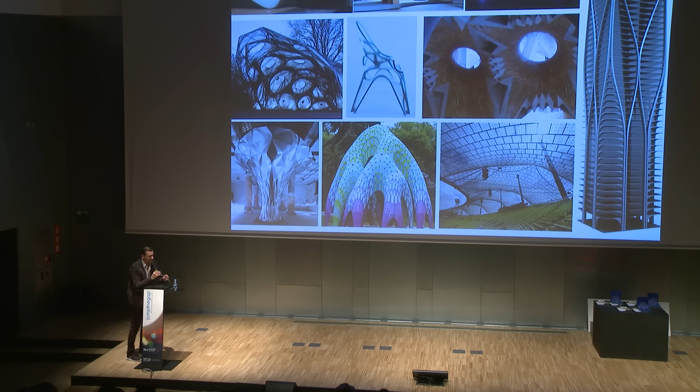So I will spend a few minutes on this. This is what this new world looks like, and you can see it's very rich, very diverse in terms of textures, morphologies, even colors, materials, detail reticulations, etc.

And it has some precursors, you can see in the images. Sagrada Familia is one of them, the great Gaudi, who was not inventing form but finding form according to the logics of structure and physics, and Frei Otto as well. The rest are all contemporary figures. We are within that, but there are quite a few others. I want to name, for instance, Achim Menges and Marc Fornes, among many others.

So this is how I want to define Tectonism: it is a stylistic heightening of engineering and fabrication-based form finding and optimization processes. Stylistic heightening because, after all, as designers we are very much interested in expression, and design is always also communication. So it is not only an aspect for us of technical optimization, but the morphologies coming out of this are very rich and become a beautiful repertoire of articulation.

So, in terms of my theory of styles, I'm distinguishing epochal styles, and the last big transition was from modernism to what I now call parametricism, which has to do with the introduction of computational technologies, but also changes in society driven by the convergence of computation and telecommunication, which has dynamized society and required a new style, I would believe. You can see that modernism has a series of subsidiary styles.

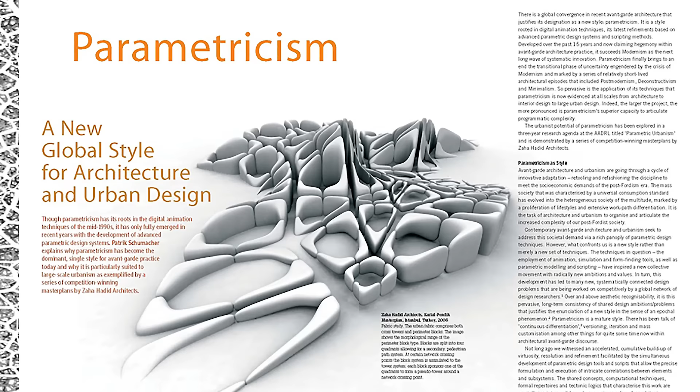So parametricism, I think, emerged in the mid to late 90s, and 10 years later I was reflecting on the fact that we had a new stable paradigm for over 10 years, and I coined the phrase parametricism. Actually, parametricism also encompasses urban design and a new order of the city, as well as architecture, interiors, and product design. So this is just an overview.

That's the work of Zaha Hadid Architects across the various scales, all the way from urbanism through architecture to products. And there's a kind of precursor: Zaha's first sketches from the 80s already show this interest in a new level of complexity and dynamism in her repertoire.

And in terms of the first expression, as it were, of parametricism, I term it in retrospect Foldism. It starts with the idea that instead of building up complexity by adding up pieces or layering pieces like in deconstructivism, one can take a single surface and differentiate it—a very adaptive and fluid set of systems which pick up contextual features, internal requirements, and gets something going which has both coherence and intensive differentiation.

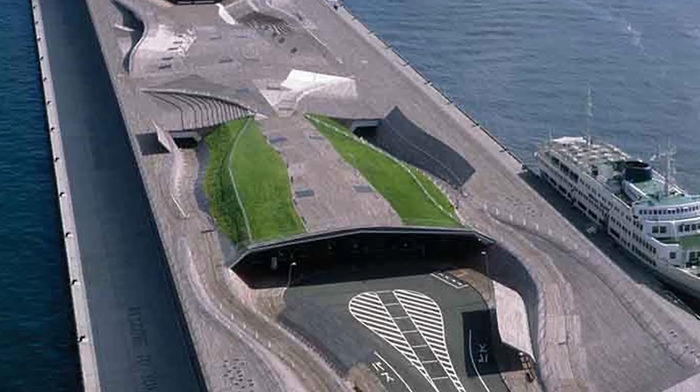So there are just a few of those projects which worked with this kind of idea of a differentiated single surface. It's not only Zaha Hadid Architects, there's also FOA. It also moves from buildings to furnishings. Some of our works, student work—this was corporate interiors, urbanism again.

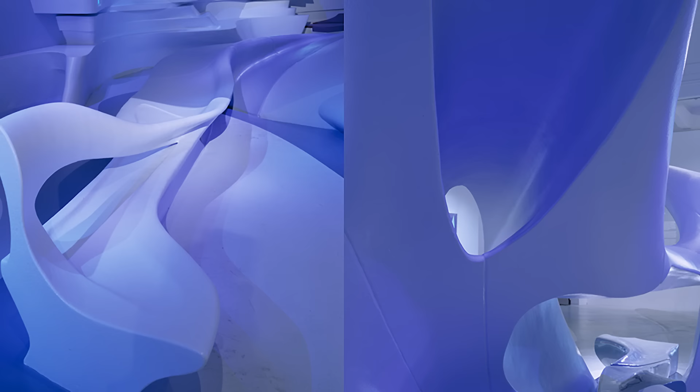And interiors. You can see here that the idea is that you have a continuous variation where situations morph and modulate from one into the other seamlessly. So it stands against a clear separation of domains and against the cellularization of space into discrete and separate domains. I'm just going to move you through some of those interiors.

Now, there's also a bathroom from us, part of a hotel room, actually in Madrid. This is a continuous Corian surface, a material where a lot happens in the bathroom, so it's used for the whole room. You can see here that the elements are not plugged onto each other, but one surface is modulated—this is a door where the handle is kind of evolving out of the door surface, or a table which I've designed.

But we also find this kind of philosophy in car design. Instead of plugging on a kind of headlight, it's kind of modulated into the surface.

And it also goes into product design and fashion design, jewelry design, if you like. So the idea of parametricism and these kinds of surfaces is that there could be a system, or genotype, which can then adapt itself to different conditions and vary across. Again, in an interior where all the different features and aspects are made out of one continuous surface.

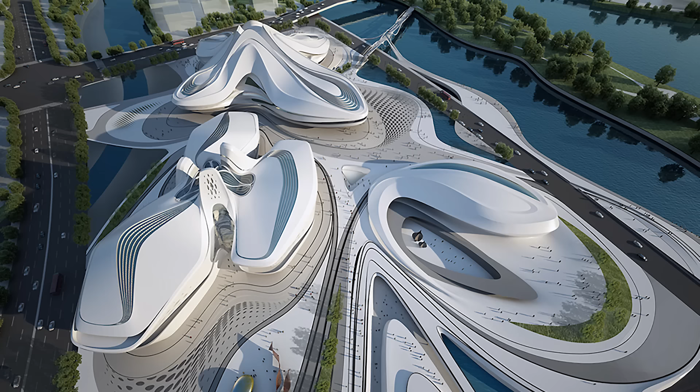A more recent attempt, the way three different institutions of a cultural complex — a museum, an opera house, and a multipurpose house — it's all about embedding this into a landscape and becoming, again, a continuous surface condition.

This is just about to finish on site right now. So as you can see, Foldism continues, even though we are in a different stage. These projects take many years to evolve, so what is happening now and finishing on site is not necessarily the latest in our design thinking.

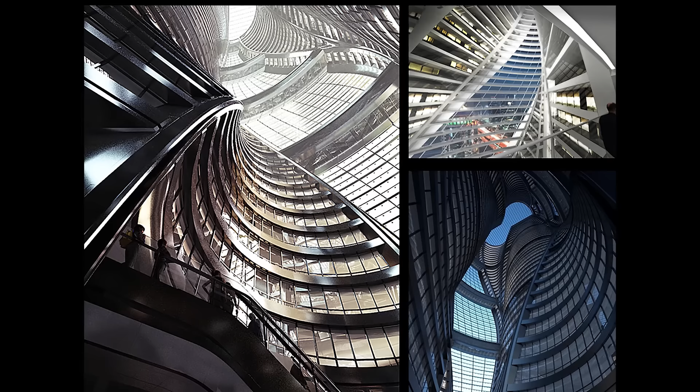Again, this also goes for interior spaces. The continuity of space — we're also applying this to towers now. Instead of separating floor by floor and then cellularizing everything, it's all about a continuous experience you can navigate. So I'm very interested in towers which are opened up through interior atriums.

So the next stage, very similar in a way, is this idea of blobism — blobs, volumes which fuse. Again, it's nearly another version of that first stage, where you move smoothly from one zone to another, and they're kind of partially articulated. And again, there's a whole world of elements which comes out of that.

And you see, it's quite striking set against all prior architecture. It sticks out, but it also delivers a new level of complexity, three-dimensionality. I describe it as maintaining legibility in the face of complexity. The fused three-dimensionality of this is remarkable.

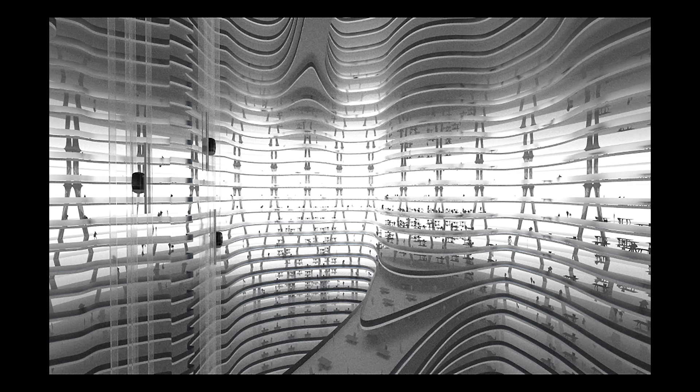And again, this is my new passion for mega atriums — the interior continuously differentiated, an interior world where everything is inter-aware, intervisible, and variation instead of separation is the game. This is a project which we're actually working on now, trying to bring it on site.

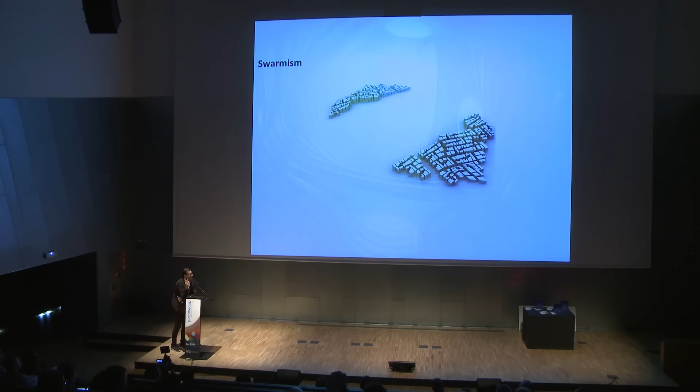Swarmism is something very similar also, but it applies to urbanism and the idea of having discrete elements, but so many that they're no longer parts, but particles which associate in different ways and can differentiate an urban scene. So you don't need to have literal contiguity — you can have swarms of elements which deliver variation and differentiation. And again, I'm interested that this operates on an urban scale as well as on an interior and product scale even.

Tectonism — so what's new? The difference is you can see it immediately: there's much more grain, texture, variety. It's not just the different morphologies and forms, they actually become disciplines. It's not just the NURB surfaces, but you can see there's creases, pleats, much more distinct identities, and there's various different materialities, and the material matters and becomes a driver of both the overall form and the articulation.

So we now show structure much more, rather than kind of wrapping everything into continuous surfaces. So the tectonics has always been this principle of—

heightening technical issues, whether it's these joint lines, which the form of the arc, the way the stones are set, as well as then the expression of the strong joints and the rustication, shows that everything which is initially a structural material logic becomes heightened into a stylistic expression and an ornamental understanding. So ornament and structure are not separate — they're dimensions of architecture which fold on top of each other.

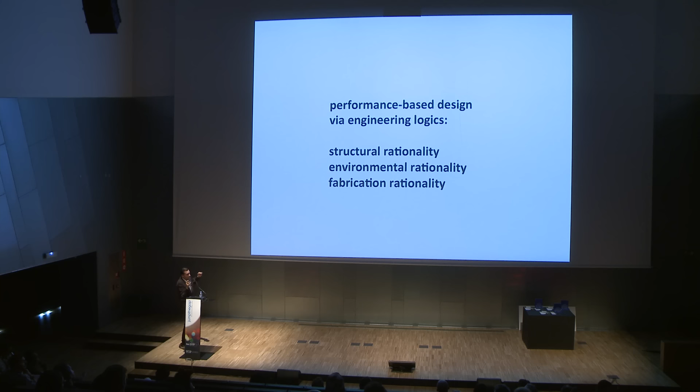So we're starting with performance-based design via engineering logics, and we're looking at structural, environmental, and fabrication rationalities. And then these are heightened into stylistic repertoires, and they characterize the space, giving a strong identity expression to particular space. And this has been throughout history.

So you can see here that the morphologies are structural, have structural logics, but they also become expressive and are treated as such — the kind of coincidence of purposes. And there's always multiple options, but they all share a very high structural performance, what you can do with stone.

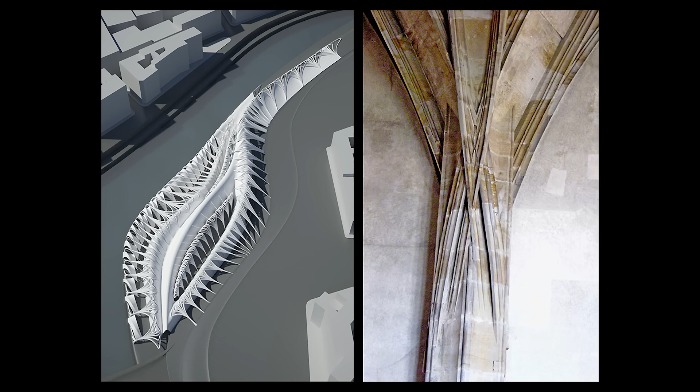So we've learned from this, we picked that up to give more grain structure, but then run with this in terms of variation—not the repetition of a particular bay, but also letting the exterior participate in this, moving from compression only to tension as well. Variation.

These are studies I did with students at the AA. And then we moved on to what we're doing in the office, various shell formations. You can see here that variation is the game. And again, going back to Gaudi.

Learning from working with materials to find these forms, these morphologies, working with models, and then translating that gradually into the digital medium to have more versatility. So this is models from the Architectural Association, the Design Research Lab, part of a design research to develop this range of forms.

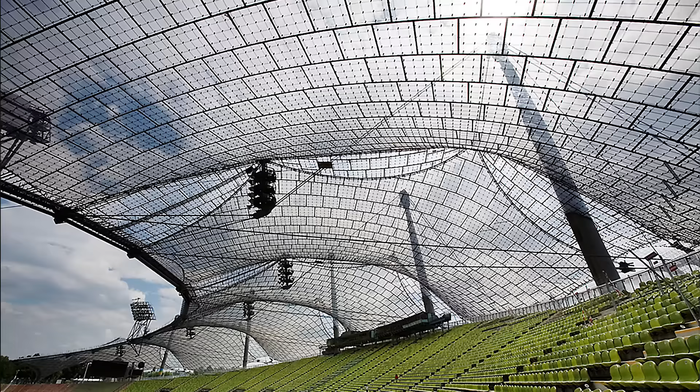What comes to light here is the diversity of forms, textures, materialities—an enrichment far beyond what any traditional architecture had at its disposal. Also far more than what modernism had at its disposal, and far more than what parametricism had at its disposal. But there are precursors like Frei Otto.

You can see that there's a very particular identity which all tensile structures share. So you can make an enormous amount of variation, but they maintain an identity across all these variations, which makes it recognizable what belongs together. So that's what I'm interested in: non-arbitrary rigor to a design variation.

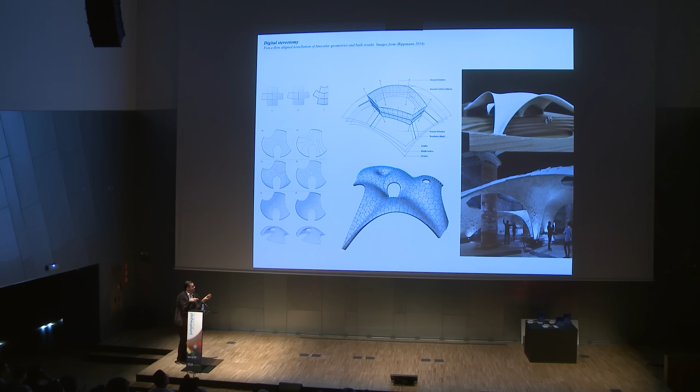And if you look at stone shells—we have a researcher like Philippe Block we're working with—he can unleash them from the traditional insistence on point and bilateral symmetries, to make a very free form, make them super thin. You can see the tessellations are also coherent with the overall form, giving a very versatile new repertoire for architects. What's significant here is that it's super efficient, but also very beautiful and recognizable.

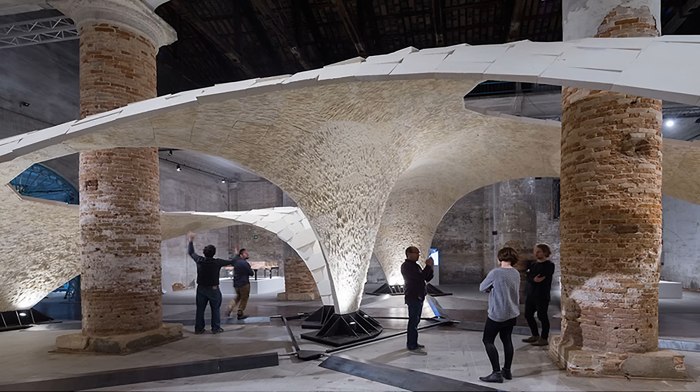It gives identity, something which we need in the built environment. There's also an interest in the different textures which come out—you see the top edge, these kind of facets show off this idea that you just work with what comes out of a construction process, and make that the ornament. That's very interesting to me. And again, there are very sophisticated ways of creating these.

So we worked with him and developed these compression-only stone vaults, learning again from history, because you find a lot of intelligence there even though there wasn't a science behind this. We recuperate this and make it a new engineering-based stylistic venture for us. I want to show some of these pavilions.

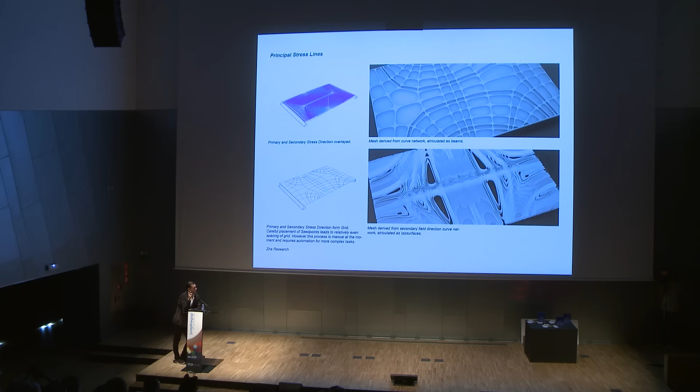We work directly with engineering software, for instance, to analyze the stress distribution, optimize and generate ribbing patterns, which we then recognize as an ornamental layer, giving character and identity. But they also tell you where's the column, where's an opening, so they guide and orient the user through a space, rather than having a generic grid, which is kind of untelling. So I talk about information-rich environments.

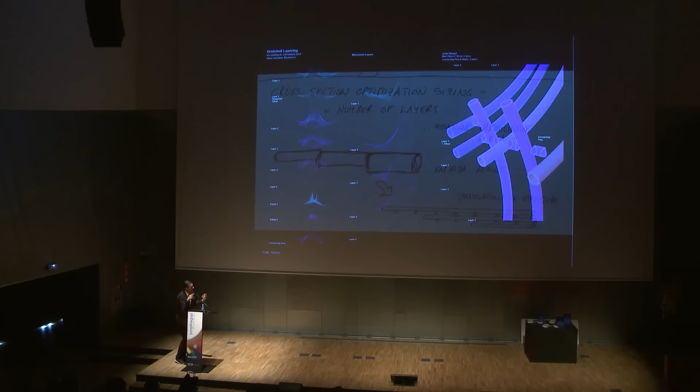High-performance environments become information-rich environments. So we worked with this and took a kind of Candela shell and translated this into an optimized grid shell with these differentiated stress lines, and you get something very striking and strong, which again emphasizes where openings and support points are.

Tensile structures, of course, are always very typical forms, so we like them—they give identity and character. The thing is, the constraint means we give over some of the form and shape-making to an optimization process. But since there are so many we could choose from, and we can set the boundary conditions, we still feel we have many degrees of freedom to be creative and empowered with our creativity in these.

So this is something I want to show on a smaller scale, the way we develop—we take the chair, the basic outline. The first thing is optimizing the shell form itself through a relaxation process.

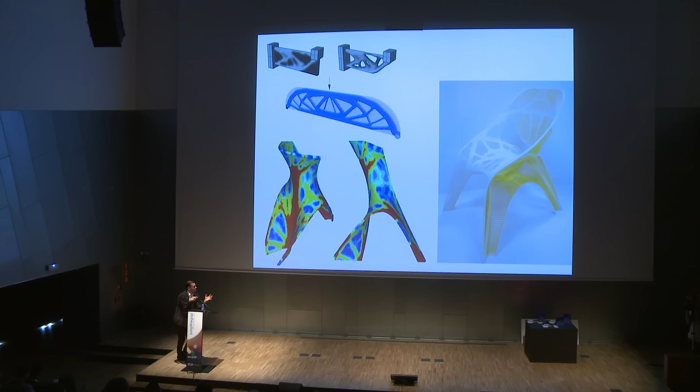Then we adopt the so-called topology optimization, so a structural analysis finds out where the surface is working the hardest and increases the thickness, taking it away where it is working least. In the end, you get a much more optimized, super light element which is still strong enough. So this is the process of finding the reticulations.

Then it's a process of deciding—again a choice—how to translate these results into thickening as well as perforating. You get something very organic, very beautiful, but super high performance. And then you can choose color to further express this, so it becomes heightened into some kind of character, signature, form and ornamentation, if you like.

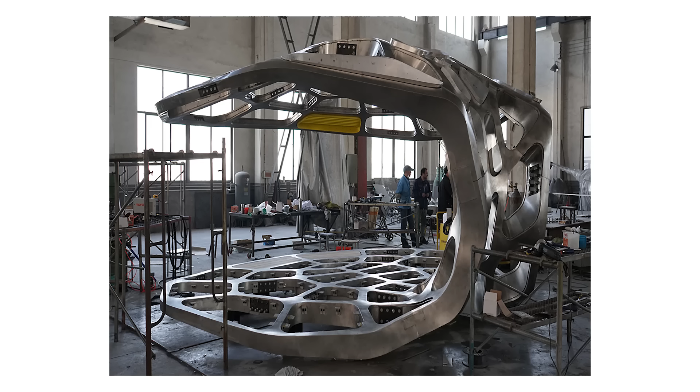And a similar process we use for pavilions, etc. So we're also looking at new fabrication technologies. They imprint their limitations, and they're super efficient, but they have their own kind of constraints, and then we work with them, and we love that there's a new kind of expressiveness coming out of that.

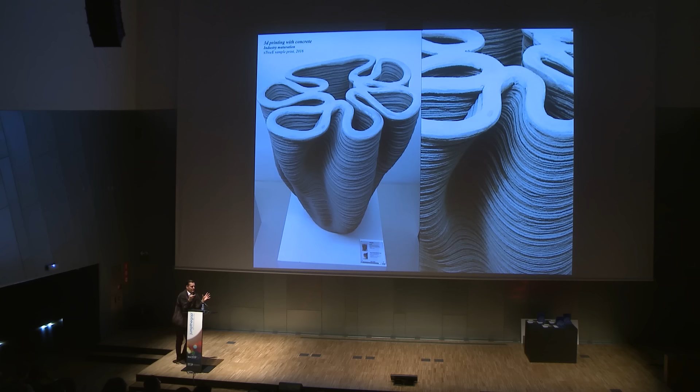Here it's not structural performance, here it's fabrication efficiency which imprints itself. So we don't mind having these layers of the printing process, this kind of factura giving character to the form. It actually heightens this plasticity, makes it more legible, etc. This is concrete printing, and again, this is very particular characteristic forms which come out of this.

There's another version of robotic printing onto a mold which we created, and you can vary the strengths and the porosity of such a shell.

Or using hot wire cutting to make molds, which is 20 times faster than milling, but it imposes constraints. These are only ruled surfaces, but then all these elements which are created like this share a typical morphology, so they become recognizable subsystems.

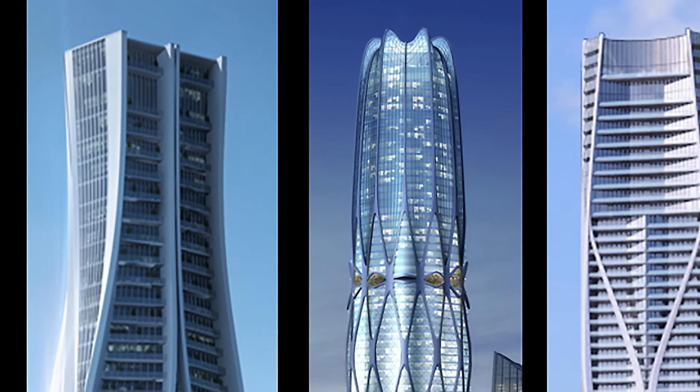When it comes to towers, we also want to differentiate, not just have the same bottom, middle and top, and use the structure to give variation across the tower and character to it. You can see here that all these towers are very different versions of one idea, which makes them also a beautiful ensemble that could come together, because they all show how the structure is more triangulated at the bottom and stronger, and becomes more calm and lighter toward the top.

So you can have unity across difference, both within the tower and across towers, which are developed from a similar methodology. I think that gives unity and identity to an environment which is at the same time quite varied and rich.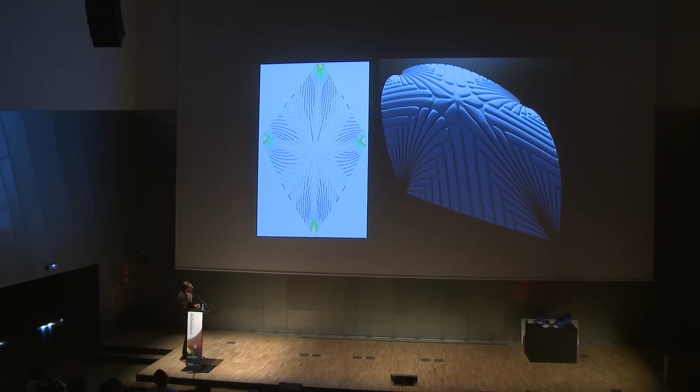Maybe one of the last ones I want to show is something which becomes a palace. It compares back to Gothic churches or Baroque palaces, and uses only high-performance morphologies like these shell forms, which are not spherical but paraboloid, using various algorithms to optimize the ribs, and then making choices. I can make the ribs like this, like this, like this. So there's again artistic choice.

All of them have degrees of optimality. You can bring in light, and you can then start differentiating different spaces. And instead of, like the different Gothic churches, now all in one project, the various atmospheres are differentiated. You know you're in the same building, but different parts of the building become differently articulated.

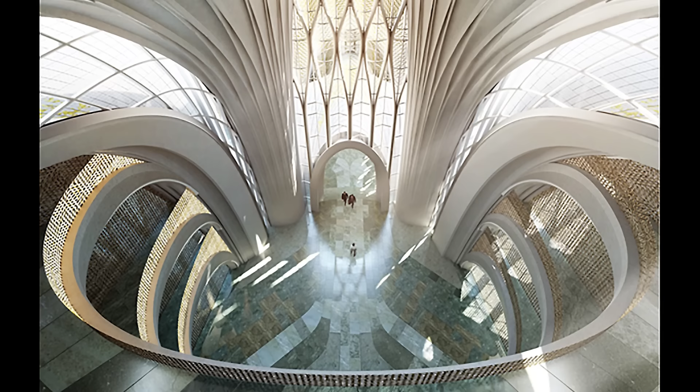This is the power we have with the tools, working with algorithms, working with 3D modeling, full simulation. It's the most design-intensive building we've ever made, you can imagine that. And instead of the 300, 400, 500 years this kind of building took in the era of Gothic, we can do that in a few years now, again working with students.

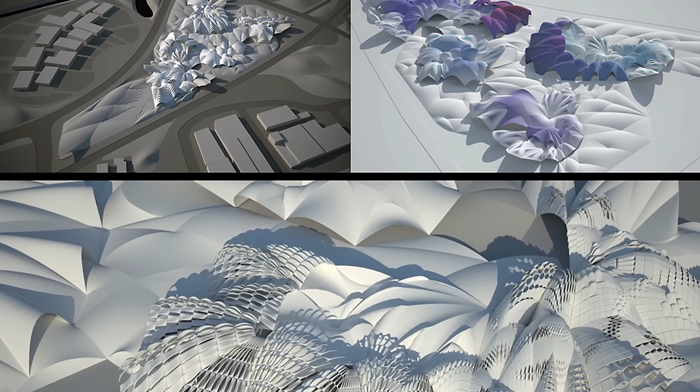So this is what we're doing in the office, which of course comes on top of a research process that took us quite a few years to develop and optimize. You can see here Google Campus proposals that I was teaching at Harvard, different shell formations. So we're trying to differentiate the campus so it's not all the same within each system.

But then for such a large project, you nearly feel that all these different versions maybe should be part of one project, so you get more variety. But all of this is tectonism, and in the end I think they should be all more varied, and all of these should become part of one project, so you get something. I'll stop here and wrap it up, because it just collapsed again. I'm nearly at the end.

You can see what the beauty and power of this way of working is. First, it is super light, super efficient, super light-footed environmentally and materially. But it also, at the same time, gives us a wide range for articulating the new level of complexity and intricacy of the various spaces which come together in the big city, so that you can navigate and find each other.

And we can overcome, I believe, with this way of working, what we're finding now: that the various expressions of the city and of the buildings are just chaotic in their juxtapositions, and we lack a convergence, a stylistic convergence, because we're afraid of monotony. But here is a style and methodology, I think, onto which a whole discipline could converge, because there's so much internal variety and richness, nearly like the endless forms of nature, where we could have both a sense of unity, navigability and order, as well as the variety and differentiation we need.